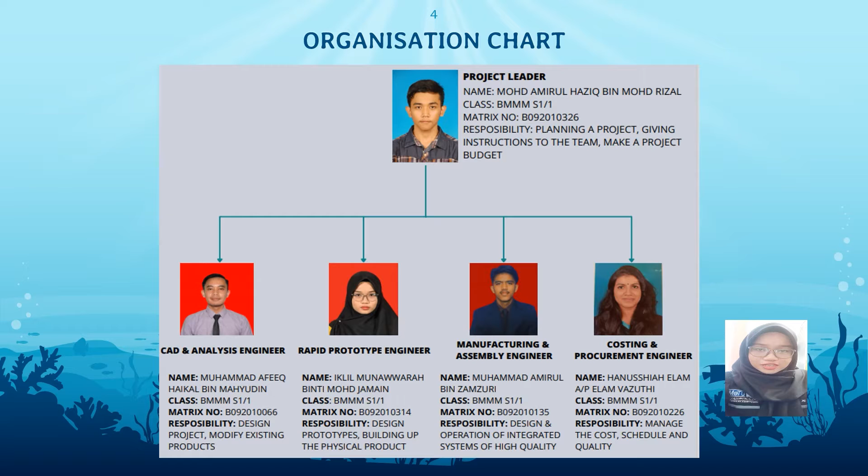This is our organization chart. Our group has 5 people, which is 3 men and 2 women. Our project leader is Muhammad Amirul Haziq, and my position in this group is Rapid Prototype Engineer.

Our project title is Aqua Clara. Clara is a female given name. It is the feminine form of the Latin name Clarus, which means clear, bright, and famous. Based on our project, we are willing to give clear water to our society, so we chose this name to make this project more innovative by the name.

The objective of this project is to clean up the water, specifically storm water, from rubbish before entering the dam area. Our scope of the project is to purify the water and provide clean water. Second, to make sure that the quality of the water is good and the water pollution is lesser than other countries. The third is to make sure that rubbish does not clog the water flow.

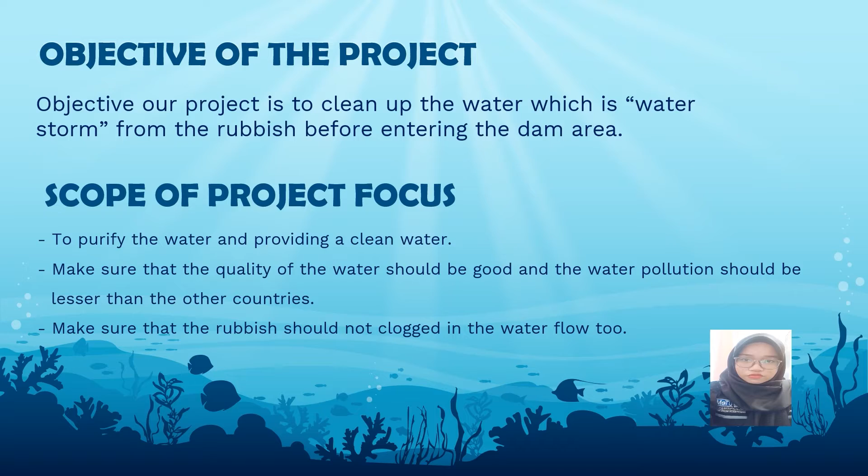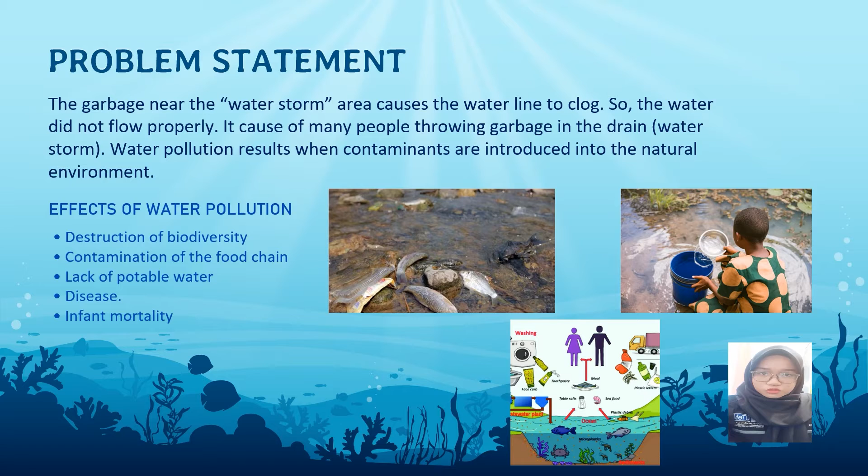The problem statement is destruction of biodiversity, contamination of the food chain, lack of potable water, disease, and infant mortality.

This is the team member job scope. Our leader's job scope is planning the project, giving instructions to the team, and making the project budget. Hanusshiah manages the cost, schedule, and quality. My work is to design the prototype and build up the physical product. Amirul Zamzuri does the design and operation of the integrated system for high quality. And Afeeq Haikal designs the project and modifies the existing product.

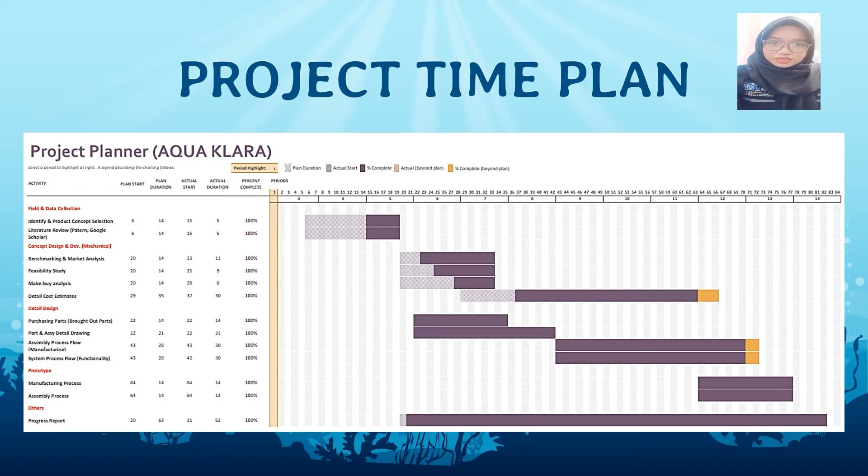For the last slide, this is our time plan for the project. We start from week 3 and finish our project at week 14. That's all from me, thank you.

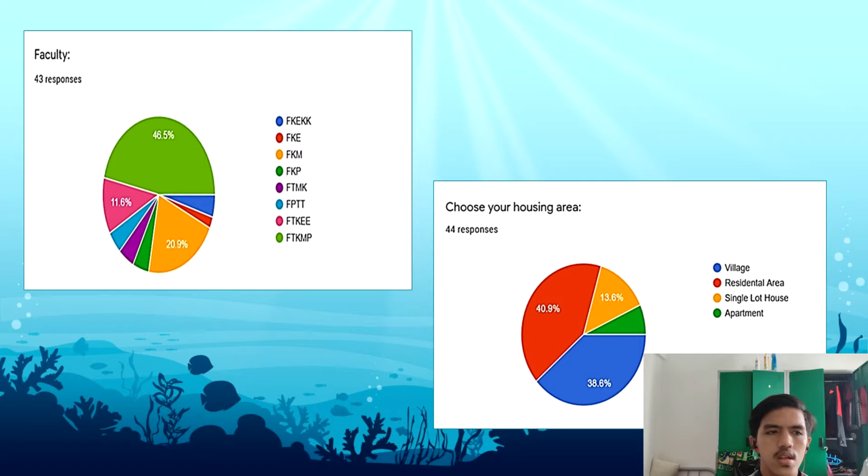Firstly, we planned to conduct an online survey based on some selected questions to the students of UTEM. From the survey, we found that most UTEM students live at residential areas. Besides, nearly half of UTEM students saw rubbish in the drain at their housing area, but most of them did not smell an unpleasant smell from the drain.

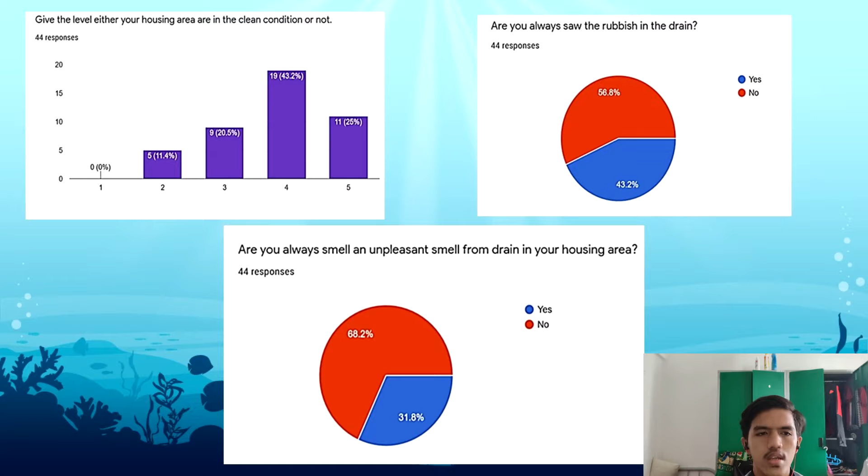Next, we see from the survey that plastic bottles and water cans are the most common things UTEM students found at the drain in the housing area. After the survey, many of them agreed that the drain water filter can decrease the amount of rubbish.

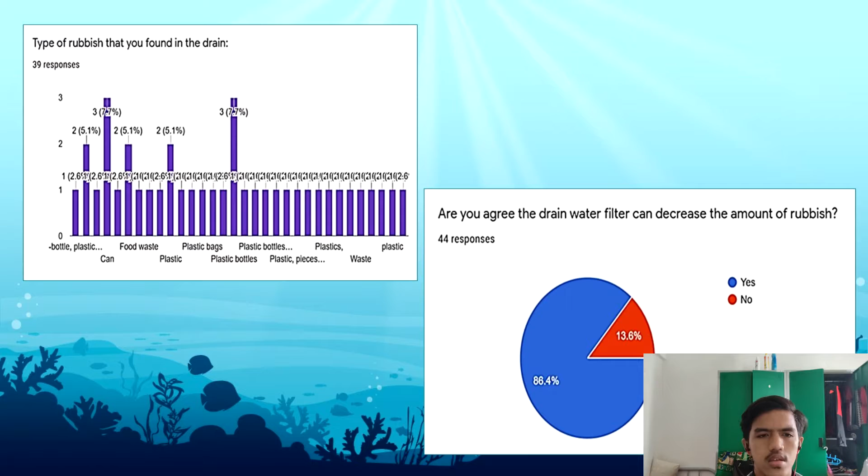So we started to generate our ideas about the design. We planned to create a mind map to enlarge the view of our project. Mind maps help to understand how deep the concept of the project is. We started as usual with a brainstorming session in the meeting to get ideas from everyone's view. We needed new and unique ideas to proceed with this project.

We started with the advantages and disadvantages of the design. Later on, we discussed the design details. We got some strong points after this brainstorming session, and we came up with a mind map, which is attached.

So after we did our research from the internet, we found the LifeStraw. After we did research, we agreed to create our base design from the LifeStraw and drainage net.

For the LifeStraw, the design was created by Cash Vestergaard Frandsen. The function of the LifeStraw is to protect against bacteria, parasites, microplastic, dirt, sand, and cloudiness. This can filter water storm drainage before releasing it.

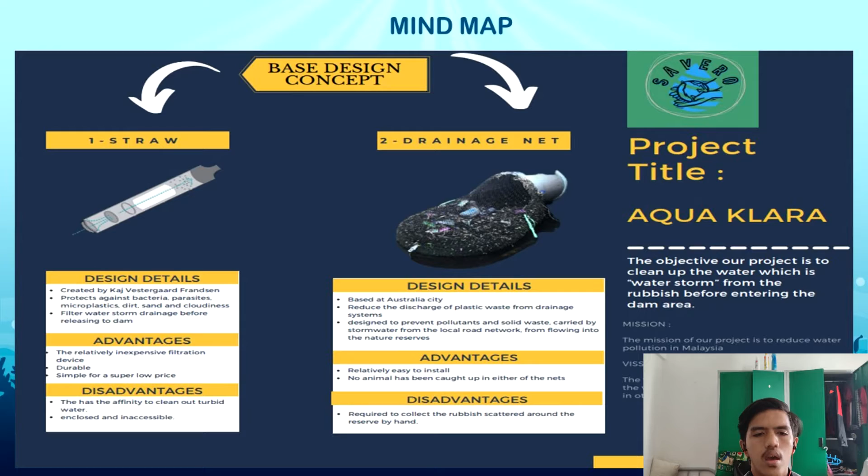And finally, we combined the LifeStraw and the drainage net to create our final design concept. So we use the filter and the nets to trap the rubbish from the drain.

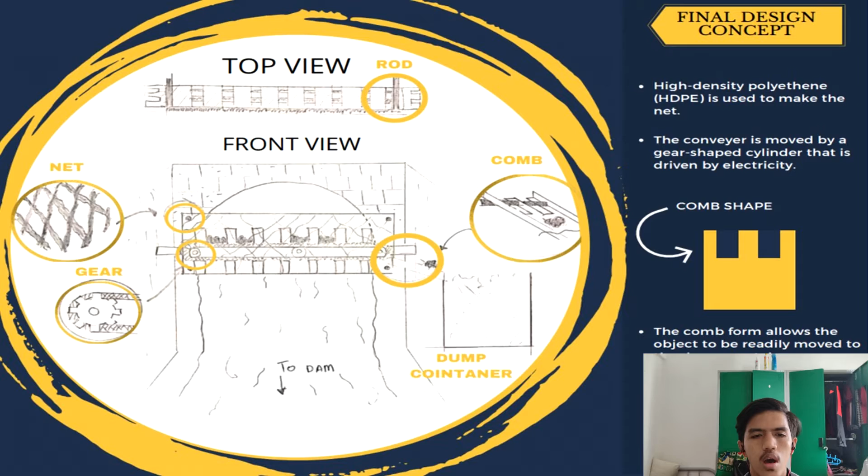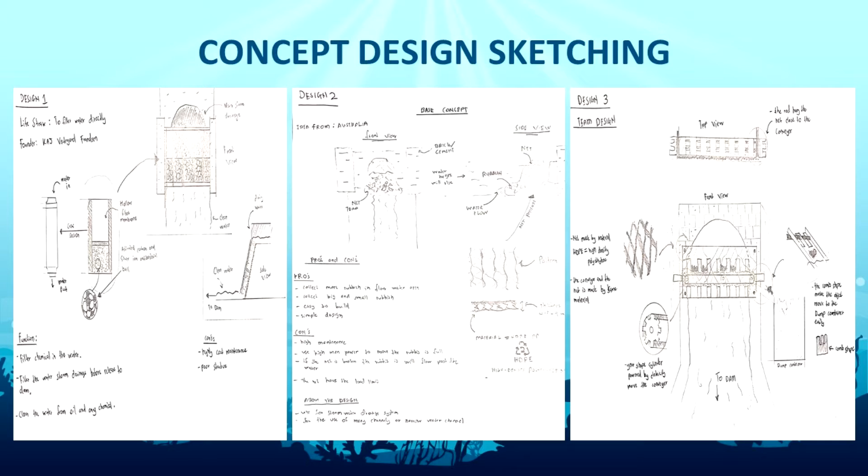We did three designs. We sketched three designs to create the project, and finally this is our final design. And thank you.

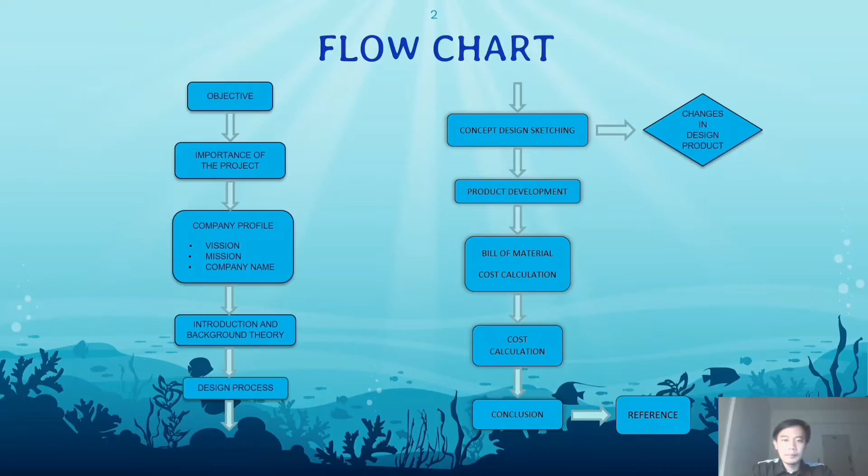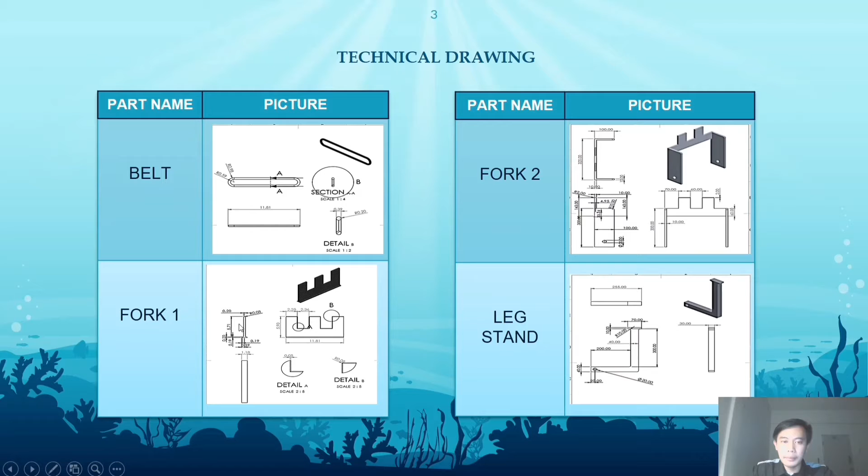Then we have our technical drawing. Here is our technical drawing: it is for the belt, this is part A, part B, in detail. For fork 1, fork 2, it is quite similar but a different fork. And this is the leg stand for our product.

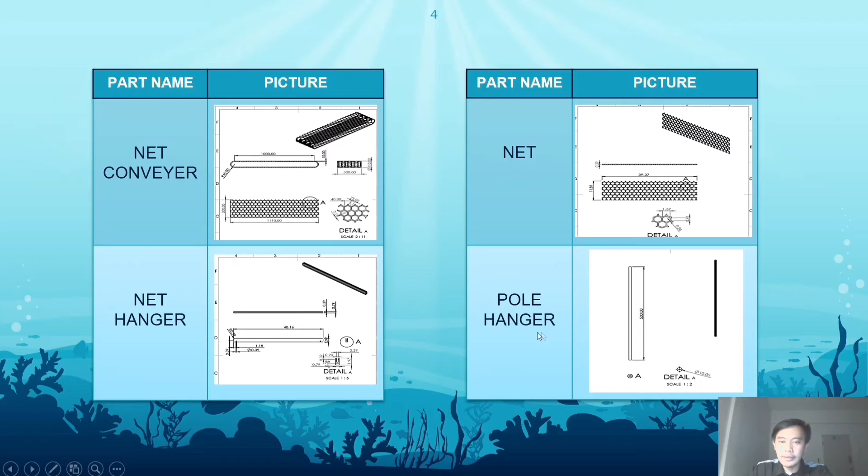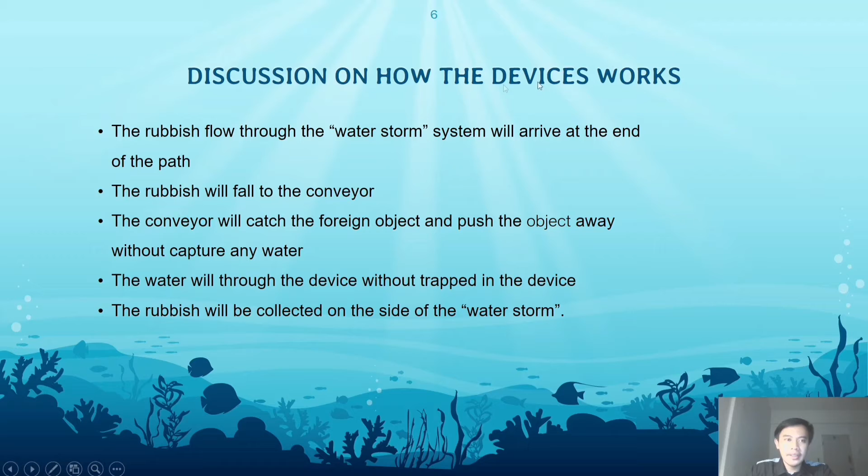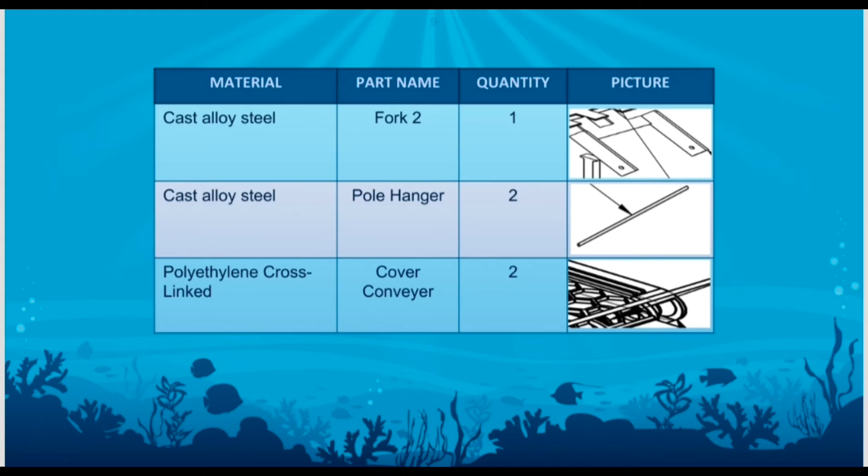The next is cost calculation. Here is our diagram of the table of cost calculation. Okay, and if we calculate all of the material cost, we need RM 967 ringgit 32 cents.

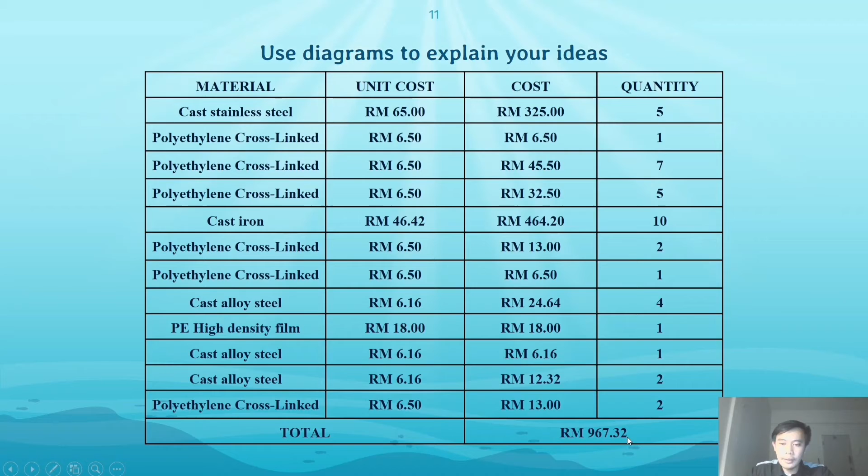The process in terms of safety, environmental, and sustainability factors: for safety, we should not need high skill requirements to service the device. Also, we need training and suitable tools to handle the device. It is for the safety of our device.

For the environmental factor, we check that the device material does not tear due to water pressure. And for sustainability, we make sure the device is not covered by dirt that comes from storm water, so that the device is always in good condition.

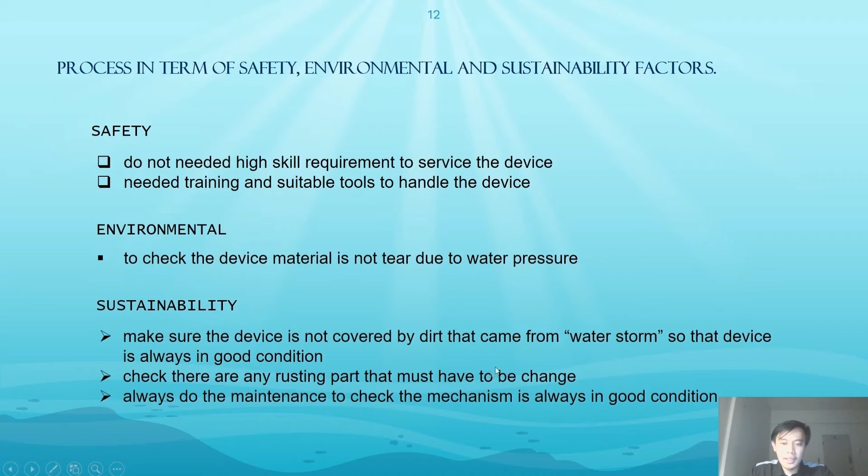Next, we check that there are any rusting parts that must be changed, and we also always do maintenance to check that the mechanism is always in good condition. Okay, that's all from me.

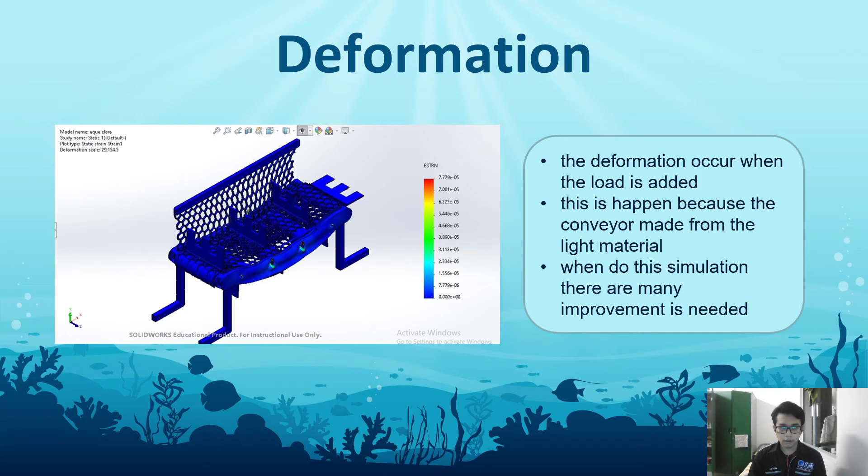Okay, today I want to discuss chapter 4 about the discussion of structural analysis results on Von Mises stress, displacement, deformation information, and factor of safety. After we did all the simulation for this project, the Von Mises stress, the displacement, and the deformation are all factors of the load that we applied on that device.

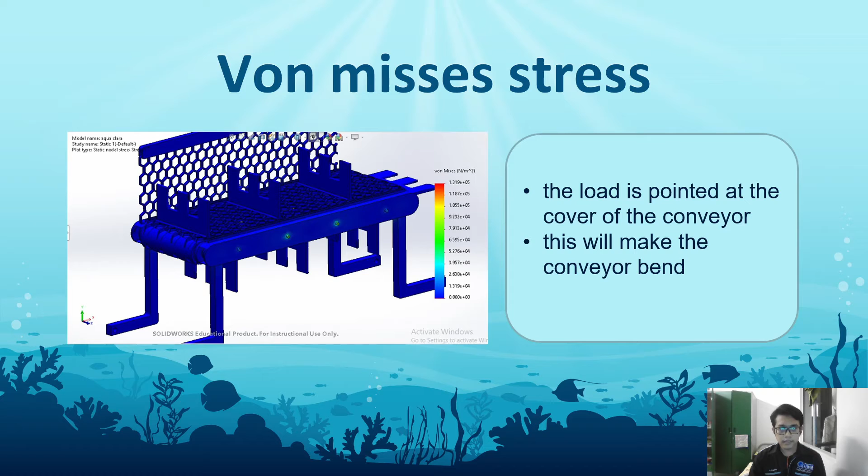For the Von Mises stress, the load is pointed at the cover of the conveyor, which means at the center point. You can see the point highlighted in yellow color, and this will make the conveyor bend. So all the load of the pressure is on the conveyor cover.

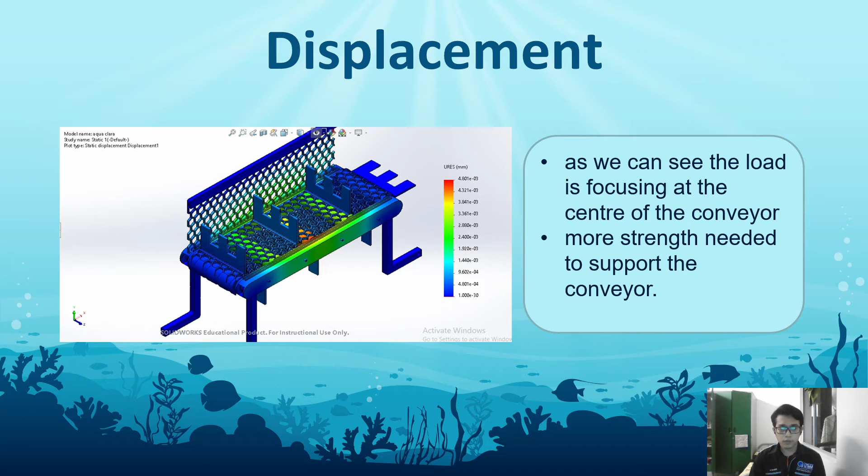For the displacement, you can see the area where the load is applied will be bent, and this results in the deformation. So the deformation occurs when the load is applied, and this is because the material used is light.

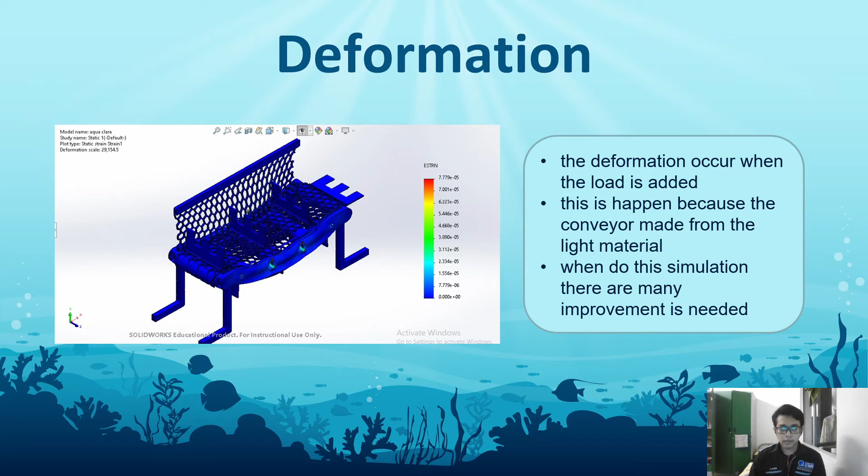The material we use is high density polyethylene, so that's very light, and the result for factor of safety is 1.2. This factor of safety we see is almost the same as in aircraft parts, since aircraft parts also use very light material, and this project also uses light material.

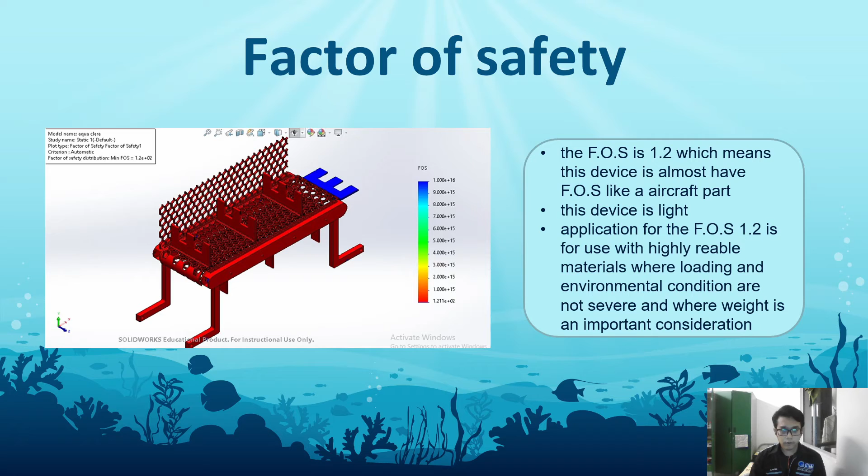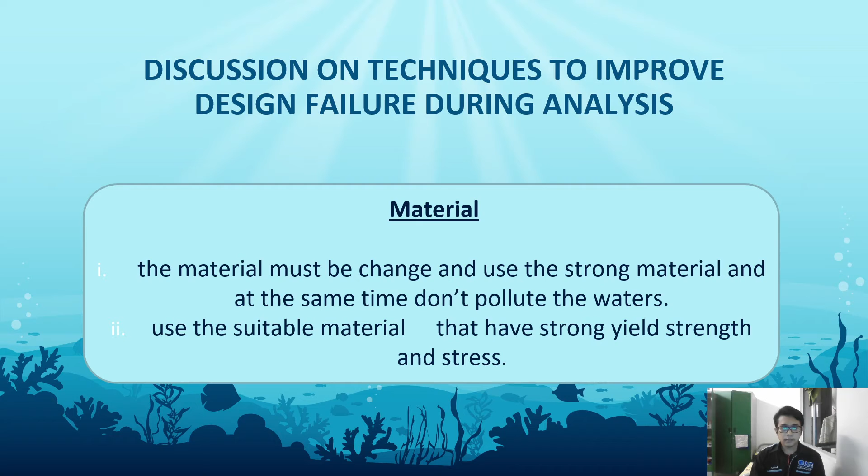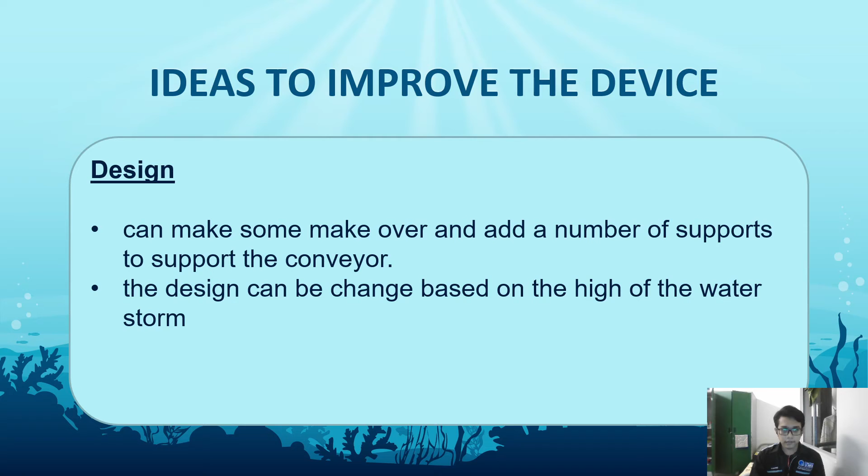Today I'm going to explain chapter 5, the conclusion from week 13. The conclusion is that the university's step of having students conduct this project is one of the smartest steps. I'm sure many of us do not realize how important this project is. This project increases students' knowledge in SolidWorks drawing.

This project gave us many advantages. This project should be continued as it benefits many students in particular, giving opportunities for students to understand SolidWorks drawing in even more detail. With this kind of exercise, it can provide students with confidence in pursuing challenges. Such skills need to be possessed by every student as initial preparation to compete in the globalization market in today's era.

Furthermore, with these exercises, students gain quality knowledge that can be applied in their future jobs. Moreover, we trust that we achieved the objective of this project, which is product development of mechanical devices subjected to design solutions by synthesizing manufacturing engineering technology knowledge that will solve broadly defined engineering technology problems in accordance with relevant standards. Besides that, to utilize modern engineering technology and IT tools in facilitating solutions to broadly defined engineering technology problems, with an understanding of the limitations, and to evaluate the impact of the design, product, component or processes in terms of safety, environmental and sustainability factors.